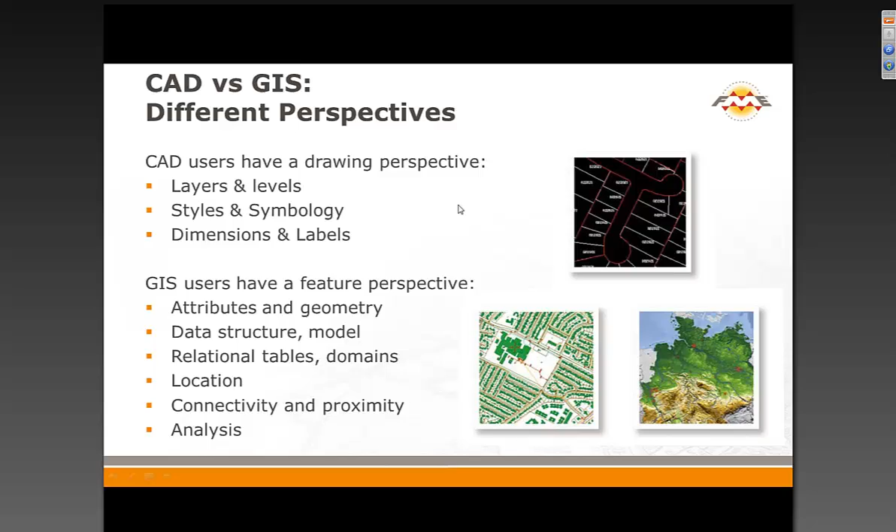So there's lots of differences to deal with. So when we're working with this kind of thing, our approach, we say let's preserve all that we can. Let's give you, as the data jockey, all the information that's possible in the CAD and give you levers and ways of pulling that out and putting it into sane things over on the GIS. So we can interpret the layers, we can get out the style number. Oh, if it's a green road, that means it's a logging road. Great, we can do that. We can fish all those things out and rearrange them very painlessly along the way.

Now, CAD to GIS is what we're talking about. You might go CAD to CAD, where all you're outputting are the things that don't follow the spec. And you give back a CAD file to your technician, and he says, okay, great, if there's things in here, I got to fix them. Or, I think we're doing dog parks today, aren't we, Mark, where we're going GIS to CAD? Yes, we are. So that we can go the other direction. You've got a nice GIS. You want to make some files in CAD for your friends and even give them some symbology.

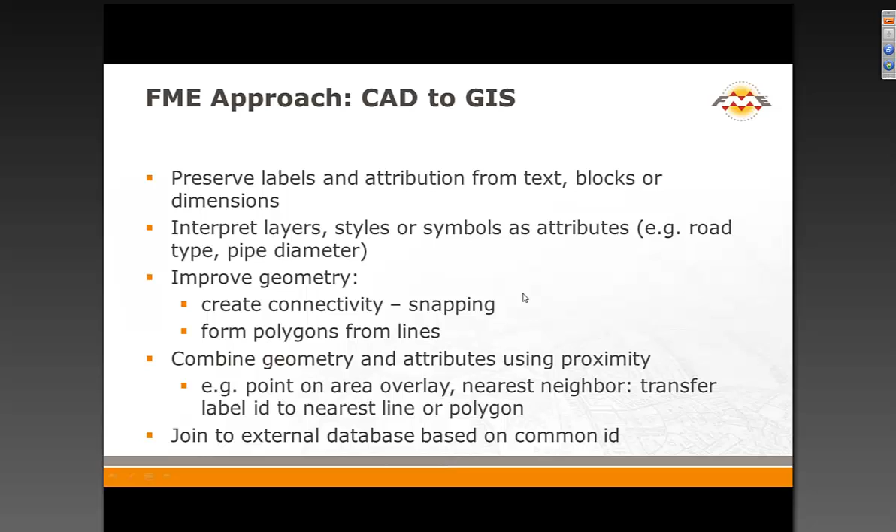And I'm going to dare you, Mark, to show the DWG styler. Are you going to take me up on that? Oh, yes. We'll use that one for sure. You whip that up while I'm talking? Okay, great. So that's a key transformer. We'll definitely look at that.

So just last quick poll. What are your biggest problems that you have to deal with? And this is where Dave is going to whip up other demos, I suppose, depending on what they answer. That was a really good worried look on his face just now. So let's see what kind of challenges. It's attributes, attributes, attributes. It's kind of like the 3 things you need to know for real estate. That's what I think too. And coordinate systems are always a lot of pain.

I guess with the new FME Data Inspector, we could at least help you: you could tag your CAD file with the coordinate system and put it on top of a background map and see where it lies to try to guess things. Yeah, that's actually a very good technique. Maybe I'll get you to whip up something like that, Dave. Were we going to show the Data Inspector? I believe Mark is going to show the DI. Yes, we'll show that. Do you have a background map there, Mark? I can put a background map on for sure.

Well, you can whip that up in about the next 10 seconds between now and when we go live to you. So let's close the poll, and I will carefully analyze those results while Mark gets his demo ready. So overwhelmingly, it's about attributes.

And so we will spend some time on that, and I will throw in a few comments of horror stories and symbology going the other way. So the DWG styler, big deal. And the object data people are in the minority, so in our system of voting, they would not get representation at all. But we are going to try to give them at least some airtime today talking about object data.

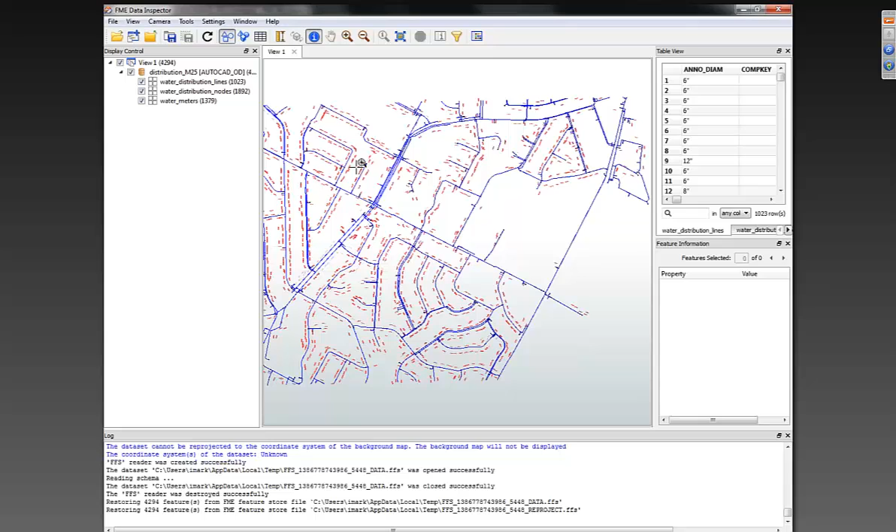And I don't know if I've got a background map turned on or not. Obviously not, nothing's popping up, but you can see the information, you can see all the three different layers of data we've got and how many features are on each of them. I can zoom in and start looking at this and finding, well, okay, we've got water meters of these numbers, which presumably is an ID, and then we have water distribution pipelines, which has got a diameter and a few other characteristics and attributes on there.

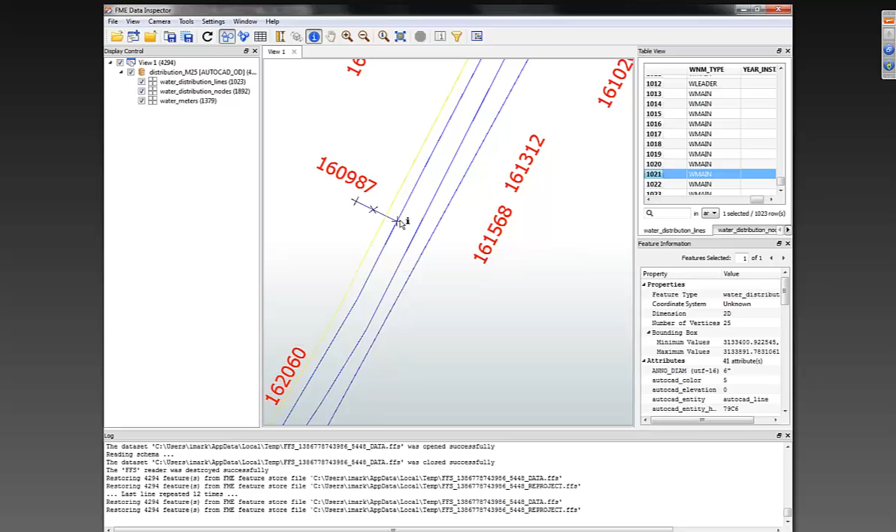And then we have these little cross symbols, which are basically exploded blocks, I think, representing the nodes in our water network. So I'm looking at that, and the data's looking okay. It's okay to go ahead and do the translation here. Let's just do that, since Dave asked about that. So here's where we're going off-roading, huh, Mark?

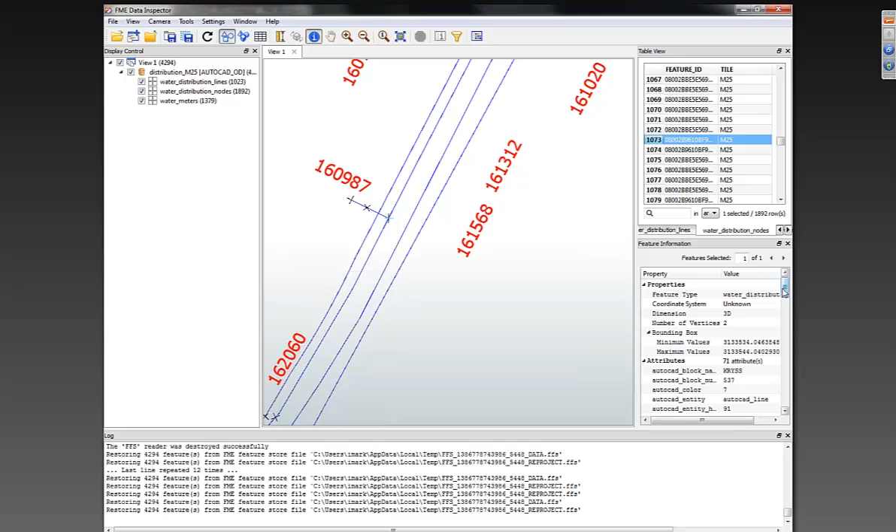Yeah, see, I do have the background maps turned on. I wonder if that data doesn't have a coordinate system set, and that's why it's... And yes, we can tell the coordinate system is unknown from your feature information window. Yes, right. It should say somewhere... It does, right there. System unknown. Okay, so looking at the coordinates there, and knowing what I do about this data, I'm going to open it again and specify that this is in TX83, Texas State Plane, in feet, and now it should load a background map. I'm hoping. Yep, it's coming in. There we go.

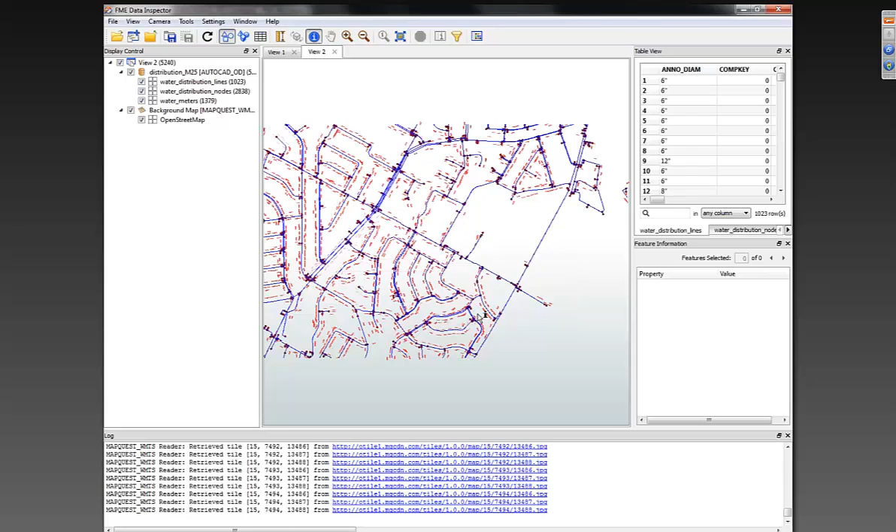So this is new for 2014. We've got the ability now to load background data from web services directly into here, just to make it a little bit easier to get an idea of the data itself. So I guess if folks don't know their coordinate system, they could use this and start guessing a few and then overlay it, and when it sort of lines up... I'm sorry that it's not more magical than that, but right now that's about the best we can do. So okay, we can see the data, we know that's fine. We've got this translation set up in Workbench, so I'm going to hit the run button.

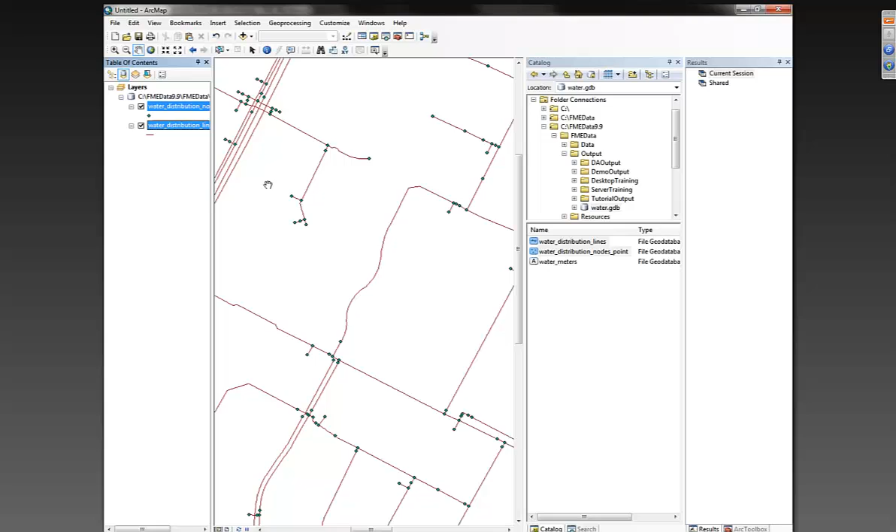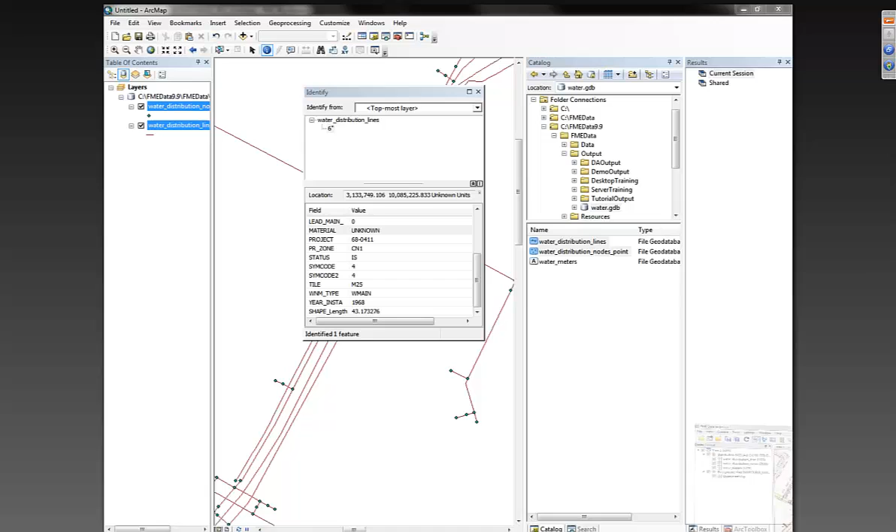Let's not bother with meters, let's just get the nodes and the pipes. So there we go, we have data that we've translated across, and if we query that, we should get the same set of attributes that we did before. So it's the annotation, diameter of the pipe, and all of the statuses and all of the other attributes, the material. All of that. So that was Map 3D. That was Map 3D object data that you fished out of there. That's right. Yes. And just to mention Map 3D, if I've got a moment.

When we open a dataset or read a dataset, you might have noticed the parameters button. If I click on the parameters button, that lets us group our data in different ways. So we can group it by entity or by the object data table itself. In this data, we've grouped it by the 3 different layers we've got, but we could group it by object data as well if that was different, or totally the raw relational tables. We could just read all of those out separately if we wanted to. Yeah, it's very powerful, and folks can do very powerful things with the object data in Map 3D.

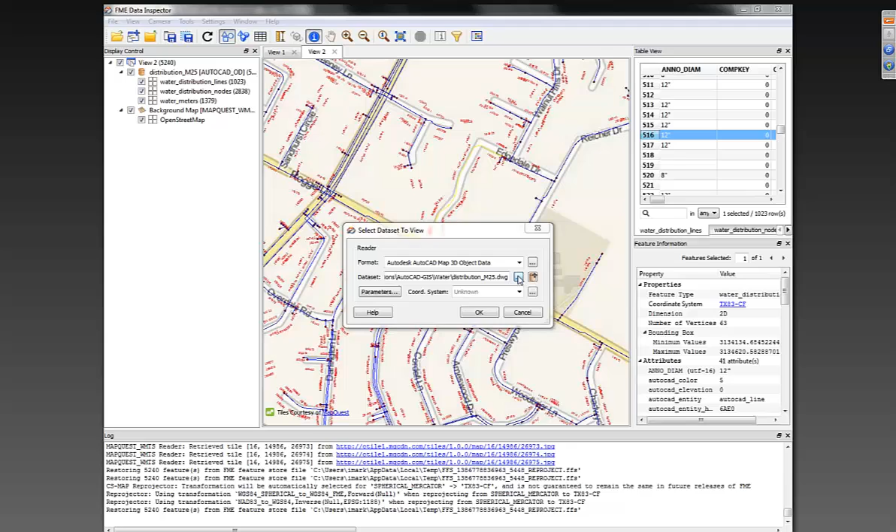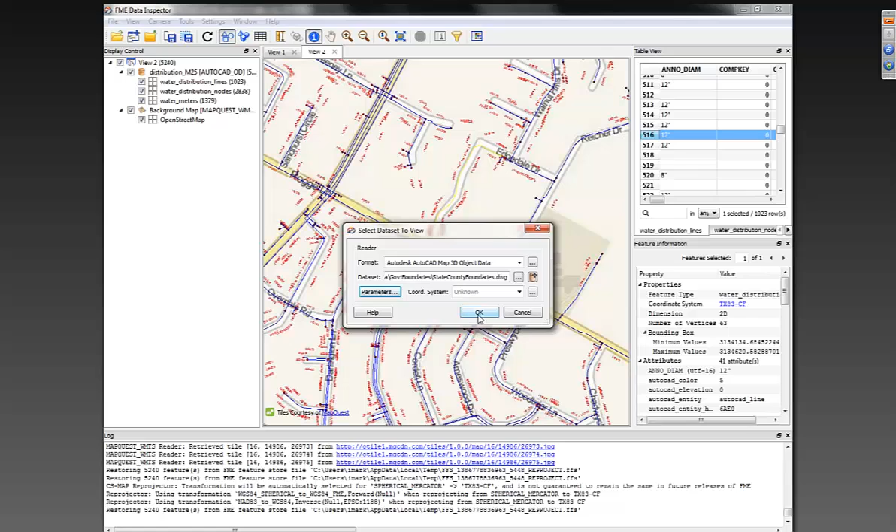If you're not a Map 3D person, and let's say you had extended entity data that you tucked stuff into, Mark, have you ever dealt with that? Yeah, we can read extended entity data through the plain AutoCAD reader, and probably the Map 3D one will do that as well. Yep, we've seen a lot of data tucked away, and also people often use some form of database linkage where they have the attributes sitting out in a database, with some kind of a key inside of the CAD file. What do we do then, Mark?

That would come up as what we call a format attribute. So yes, if I query something, we can use it. Oh wow, there's Texas. You got all of Texas here for us. Yeah, I just wanted to show this because this was a Map 3D data set, which I really like, because the thing about Map 3D is you can share lines. Like the edge of the state can also be the edge of the county in here. And so that's what this Map 3D data had.

And what we've done, we've pulled it out as the Map 3D table. So basically we should have 2 lines there now. So we converted that one line into 2 features. So now we've got a feature there for the county and a feature for the state boundary. Or we could keep the 2 as one single line with attributes that said it linked to both.

Right, so I can see in your feature information it shows you've got 3 things selected. Can you just pan up to the top of that so we can see the feature types? Yes. So there's the boundaries, that's the county data, and the state data. Right. And those tricky Map 3D guys end up storing that as one thing, but the GIS guy might need that in 3 different places.

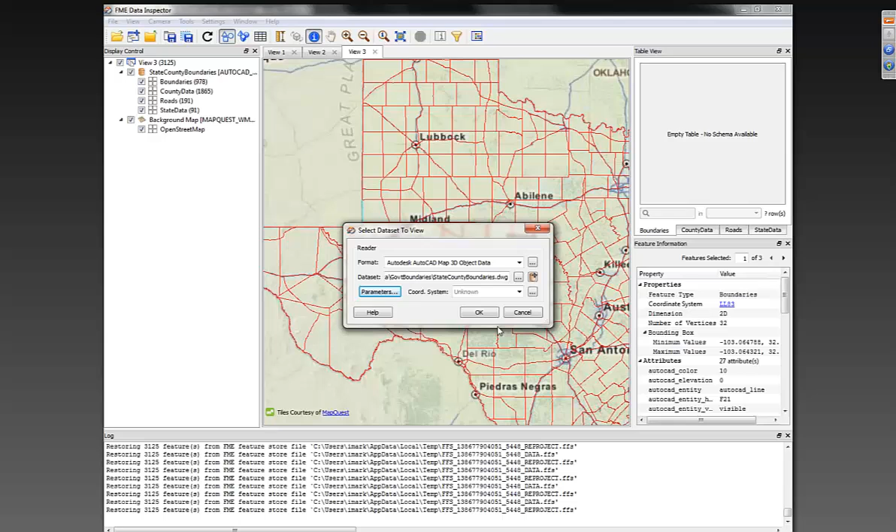That's right. And we can still do that as a single one. I think group by entity will keep it so. We'll then merge all the attributes on. Yes, so we'll keep it as one single feature, but like you say, merge all of the attributes onto the same one. So there we go, only one. That's everything, but you can see the layer says boundary.

There's also state and county data, so we know it's everything. And it's got the attributes. I see the state is Texas, the county is there too, Andrews County. Yes. Excellent. So there's several different ways we can read the Map 3D data, which I really like. That reader, I think it's fantastic.

It is dangerous though when you're messing with Texas like this, Mark. I'm not messing with Texas. We're just...

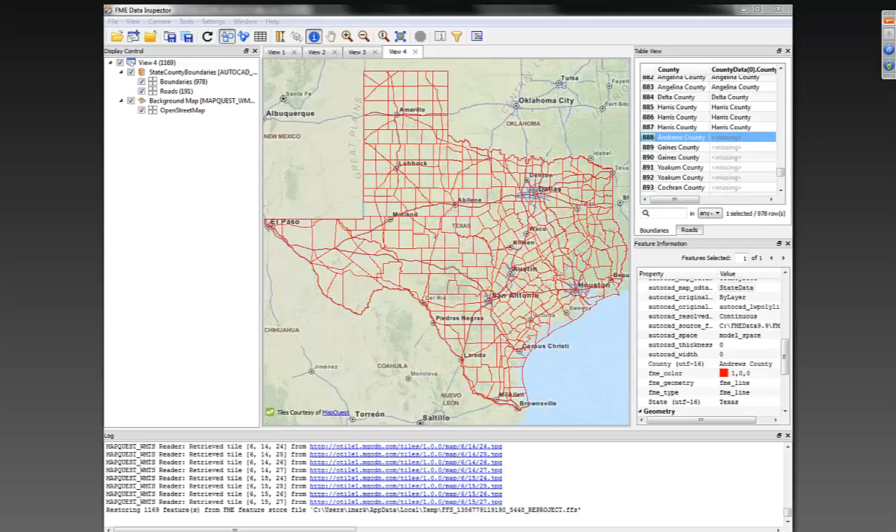Okay, so let's go for another demo. What we'll look at here is doing a bit of transformation of one of those strange scenarios that you were talking about, Dale. In this case what we've got is the attributes are stored as pieces of text or labels, and we basically need to find those labels and attach the information onto the features itself. Ah, the old label gag.

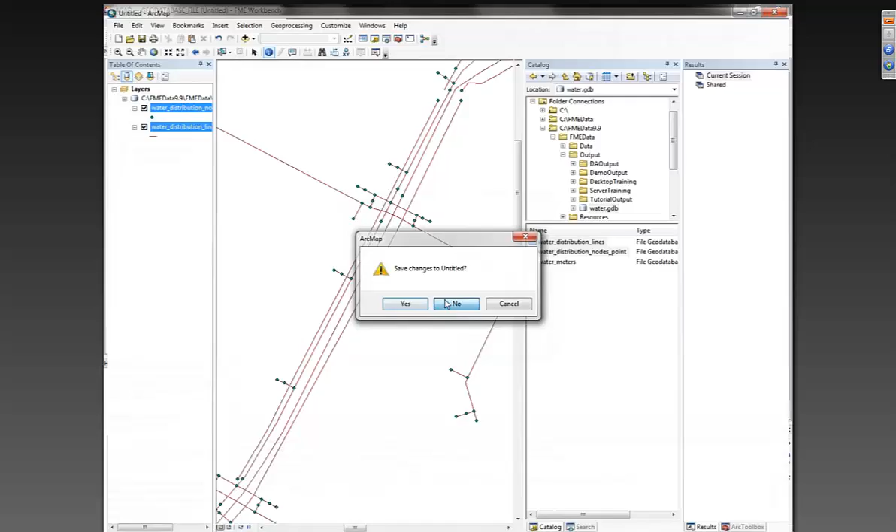Yep. So we're going to read just some plain AutoCAD this time, and it's the wastewater. And we might as well go to Geodatabase again, and we'll just say to overwrite that Geodatabase. And I'm going to shut down ArcMap as well, just so we've not got that locked in any way. Okay, wow. So what have we got here? Well, let's have a look. I think perhaps I generated that slightly wrong. Let me try that again.

While you're regenerating, someone asked if we can write to object data, and absolutely, and we can write it in very powerful and interesting ways. So that'll all be part of that webinar that Dave's whipping up for me to broadcast soon. Yes.

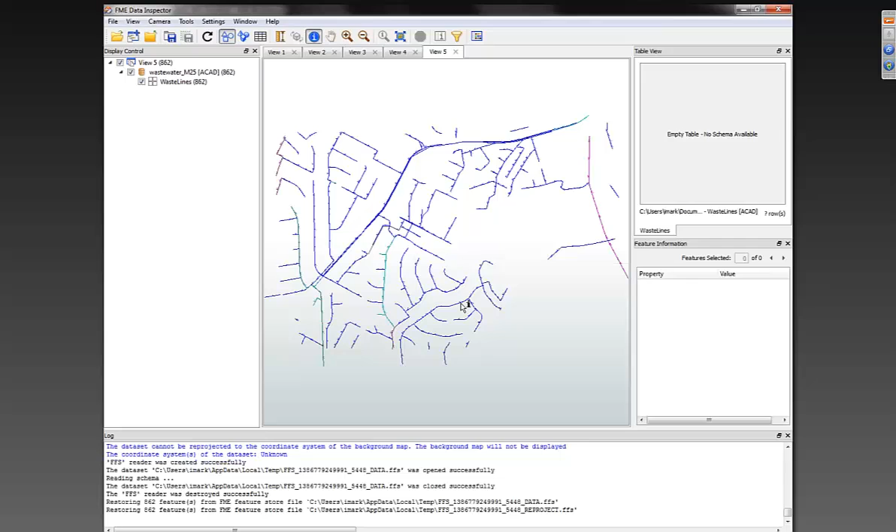Okay, hey, that looks cleaner, Mark. Yes, so there we go. So it's through the geometry filter, which is really useful actually in this case, because if I go and inspect this data, we'll find that lines and text are all on the same layer. So we have to filter them apart with the geometry filter. Living together. Yes, they're all on the same layer, and the size of that pipeline is stored in a piece of text that's right next to it, which is a typical CAD thing. I've certainly seen that before.

So what we need to do is basically, in fact, for users who have used FME before, I'll just mention this. In 2014, the geometry filter doesn't have the long list of geometries. You get to pick which ones you want to expose. So I just mention that as an upgrade for 2014. Okay, so we're going to put what we call a neighbor finder in here.

And the neighbor finder... Can you handle that spelling of it, Mark? I can do it both ways. We can do neighbor finder with a U or without a U. Okay, so it should have a U, but I know.

Okay, so the lines are the base, the text is the candidate, so we're just going to grab that.

Okay, so what we're going to do now is say, let's find everything that's within 50 feet of the pipeline. So that's basically saying, for each pipeline, look within 50 feet of it to find the nearest piece of text, and we'll assume that that is the size of the pipe. And so it's going to merge the text attributes on. Yes, that's right. In fact, what I'm going to do is I'm just going to

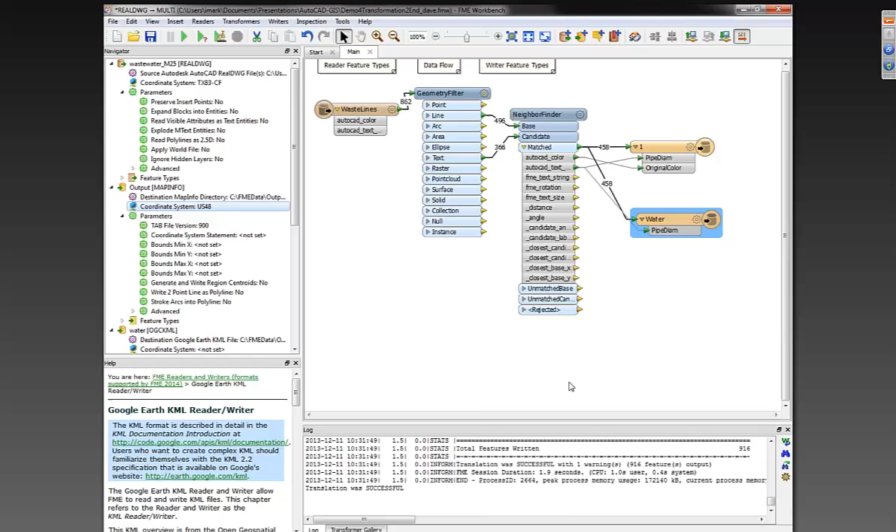Nothing bad will happen. And we don't need to set the coordinate system on KML because FME will automatically translate that into lat long, because KML is always lat long. There's no two ways about that. So notice that when Mark runs, we see a statistical breakdown on our graph about what happened. So 862 things read in, split into 496 and 366. And then you got matches on 458, which means you didn't get matches on a bunch of lines.

If we were worried about QA things, we would then look for unmatched base, which right now is being ignored. That's right. And you could do something with that. Send that back to your CAD guy and say, hey, label these, dude. So that will be the 40 features that didn't get labeled, and we could check where text wasn't used, unmatched candidates as well. We could say, well, this label's floating in midair. Yeah.

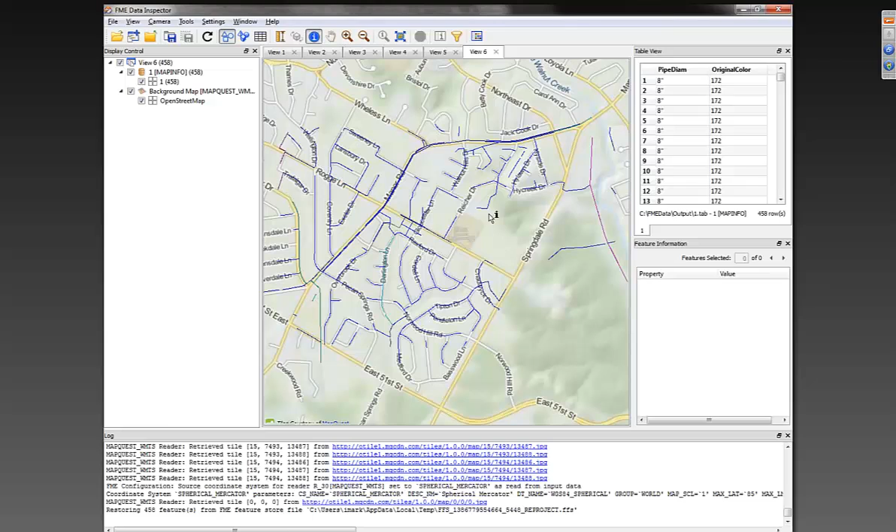And so let's just inspect this data. It was MapInfo I ended up writing it out to, and we get the background map, which is good because that shows it's in a coordinate system. And it's in WGS 84 coordinate system, and you can see we have the attributes in there, the pipe diameter and the original color. So we've grabbed that information out of the AutoCAD data. Mm-hmm.

Okay, so Dave, you were going to do a demo now of Civil 3D, is that right? I think we're going to do a little bit more and show some validation we can do, against the table. Okay, well, we can do that.

We're reading out all of this data at the moment, and it's all coming in on the same layer. So we could put a tester in there to see. Well, what we can do is set a merge feature type, which says read anything on any layer, and that will handle the data. If someone's put something on the wrong layer, it won't matter because it'll come through here, and we can still read that data.

That's handling it just in case all of the data's on the wrong layer. We could put a tester in here and say, let's test if the AutoCAD color is this, then do something. That's a good way if the data's all been color coded, as it does sometimes in CAD data. If you've got data all on the same layer, but the color means a different thing, we can filter that data out, finding and splitting it out by color.

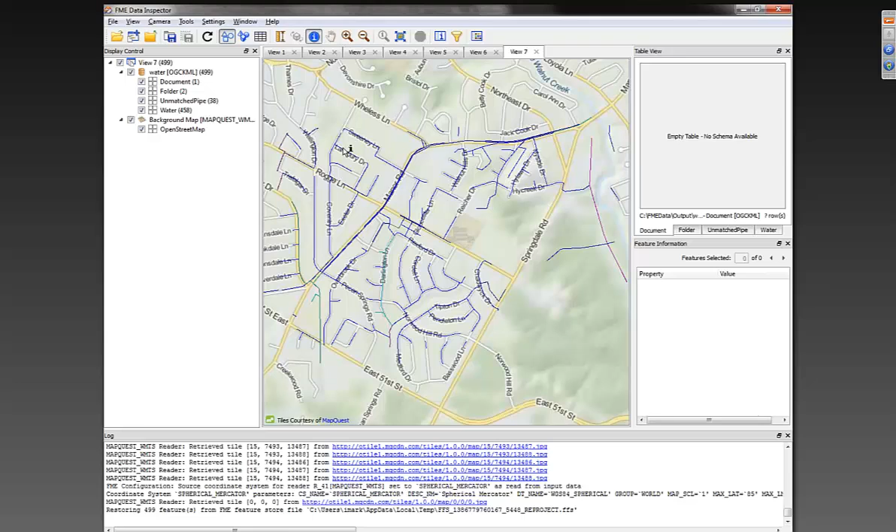We can do the same thing with the unmatched pipes as well. If there's some data coming through, say we've got 40 pipes that didn't match, we'll call it unmatched pipes, and that data will get written out when we run this translation. So yeah, 38 features now. So we know by inspecting this data, it's in KML, that's fine. So where are we? Unmatched pipes.

We'll just turn the background off. So you can see these pipes are the ones that didn't have a label close enough to be matched. And of course, their table shows that all the pipe diameters are missing.

That's right, yes. So let's switch over to Dave now, and we'll make him the presenter. And there you go, Dave. Dave has done another slight addition to this, where it might get tedious if you have lots and lots of things to validate.

You could put the validation rules out into another table. So here's the idea where you've got this table that lists the valid diameters in your case, right? Yeah, I essentially picked the diameters we had in this case and removed one just to see that it would work.

So I'm reading in the CSV table using the CSV reader down here, and we run it through to a feature merger. This is going to merge the diameter of the CSV file against the text we've read off of the label, and make sure it finds a match. If it does find a match, it will go to the output. If it doesn't find a match, we'll just log it in the log file for now. Let me just take a quick run.

Okay, that's unexpected, but we won't worry. We're on a short time, but essentially it will work. When there's red in there, it means the demo isn't working, so we'll just hit stop. Yes, and we won't worry.

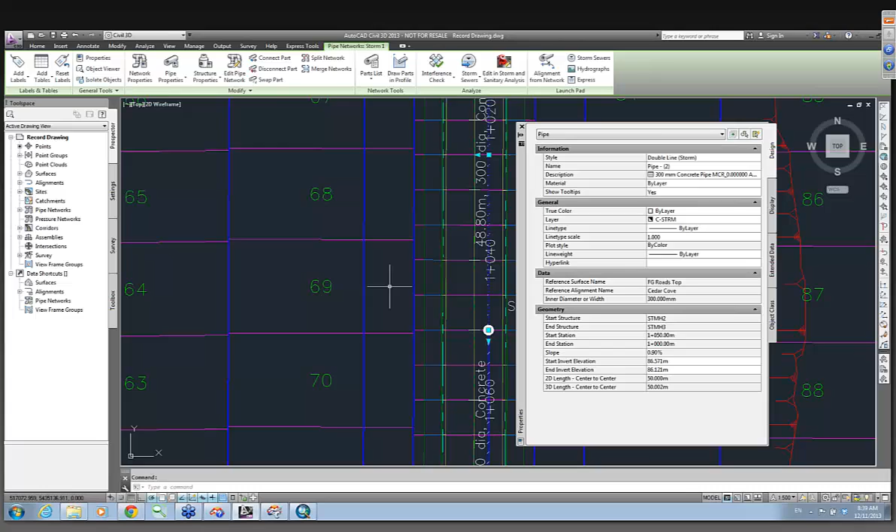So this is a sample Civil 3D file. Again, we're not going to read everything in this file, so I'm going to concentrate on something useful to the plumbing guys, which is pipes. So we have a pipe here, and it's got some interesting information on it. Most importantly, it has invert elevations, 2D lengths, and a slope — things you need to know when designing drainage systems.

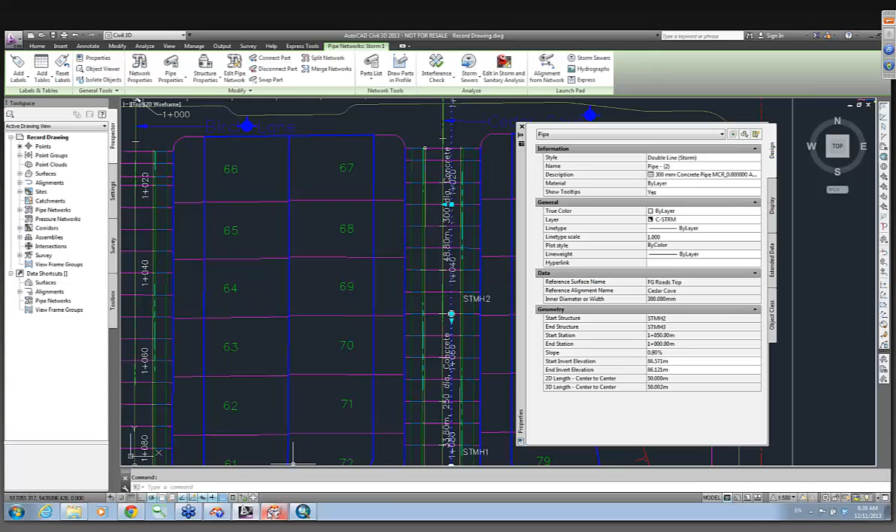We're going to bring this into FME. The first thing I'll show you is that when you read a Civil 3D file into FME, you have the option to just read the Civil 3D entities, or you can read all the Civil 3D and CAD entities. In a lot of cases, people build up a Civil 3D file by bringing in CAD data and manipulating it to build proper structures. So we can grab just the Civil 3D data, or all the construction data as well, which is read in similar to standard AutoCAD, as layers. We'd probably want to expand blocks off, and you have all the other options you'd normally have with AutoCAD import.

So we're going to cancel this, and I'm going to go, like Mark did, big on the whole canned cooking show type thing.

We're back. This is a workspace I've made to bring in that information from the Civil 3D file I showed you into FME. And what Dave has done, for those new to FME — you've spent a little time making this nice and pretty, pleasant to look at, using bookmarks to color the different themes you're dealing with.

Yes, and I find that really helps if you create a workspace and then go back in six months trying to figure out what you did. I'm getting to an age where I don't remember that so well anymore, so tools like this aid your memory, and it looks pretty if you're trying to impress your boss too. I'm impressed.

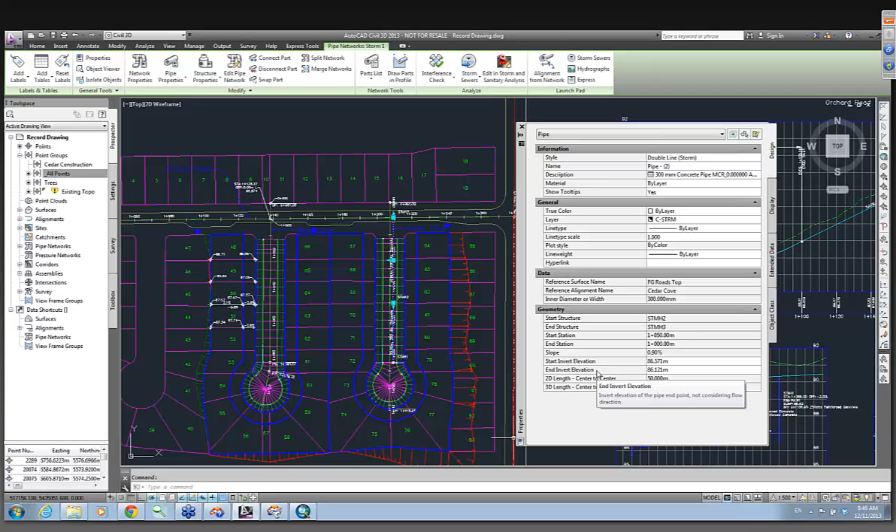Now the most processing goes on here in the pipes. One interesting thing, if we switch back to the pipe information, is they have these start invert elevation and end invert elevation. The sneaky thing about Civil 3D is it tells you information it doesn't store. So in this case, the invert elevations are not actually on the pipe features as they come through. What they give you is the pipe centerline elevation and a pipe diameter, and from that you can calculate the invert height and the crown height as well.

So essentially, that's just what I've done here. I've got a length calculator which calculates the length in 3D. I renamed a few attributes and rounded them off to the nearest 3 decimal places to make them prettier. I extracted the beginning elevation and the ending elevation, and then used the attribute creator to do a bunch of calculations to get the invert elevations as well as the slope.

So from the length and the elevation difference between the beginning and the end, you can actually calculate the slope, and that's what Civil 3D does when you click on that to give it the information. So again, that's something we have to reproduce, and we can reproduce it quite easily within FME.

Because this way you can tell that your water flows downhill. Exactly. It's very important, because it's not all water.

So what do you do then? This is the resulting output you're going to show us? Yeah, this is the resulting output here. So this is in ArcGIS now, Civil 3D to ArcGIS. Yeah, ArcMap. So here we come out.

I've just thrown a few symbology settings here. So we have our pipes - we put little arrows on the pipe to show the direction they're flowing. We have spot heights with elevations, and we've got your trees showing which are deciduous and which are coniferous.

And if I click on our happy little pipe, we'll see that we have indeed gotten the invert elevations and the crown elevations, the slope percent, as well as we've extracted these things named after some interesting people that I have no idea what they do, but they seemed important, so I threw them in. Okay, so essentially that is a Civil 3D transformation.

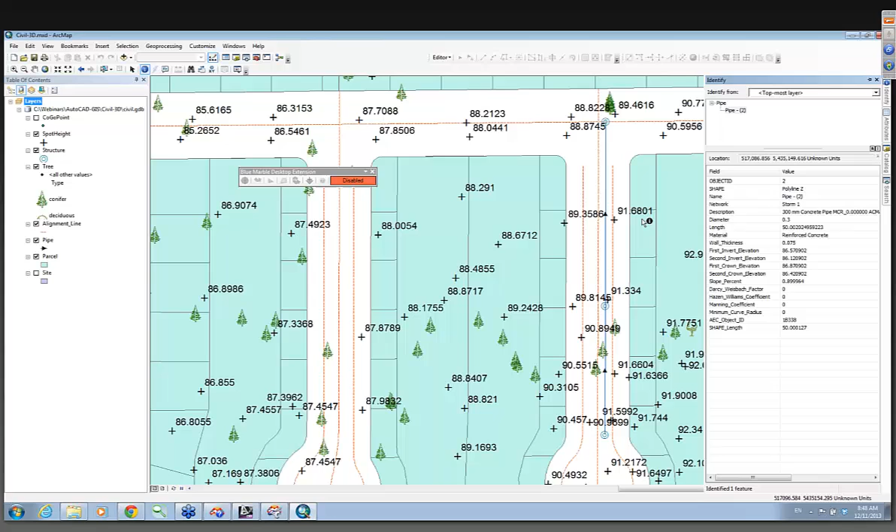So it's not dead simple - there possibly may be a little work involved, but as you saw, the workspace was not really that complicated.

Right, so we're closing in on the last couple demos. Mark, I think you're going to do some dog parks for us now. Is that right? I am, yes. And your mic is a little bit far away, Mark, I think. Oh, sorry, there we go. You're right, okay, I pushed my mic up.

Okay, so one thing I wanted to mention, a lot of people had asked about missing coordinate systems and what you can do about that. Yes, and we do have a bunch of transformers that will handle that when you're converting from CAD to GIS.

There's the basic offsetter, so you can just offset your data if it's on a certain grid. You could offset it and scale it if you know the scale factor and offset for a small local grid. There's the affine warper, where if we've got a set of control lines that says where the data should come from and go to, we can warp the data like that. If you know all of these coefficients, you can just feed them straight into the affiner.

There's a local coordinate system setter, which says, okay, I know it's in a local coordinate system and these are the parameters, I'll set it like that. So yeah, there's several ways that we can cope when the data's coming in but doesn't have a coordinate system, and you need to get it into the right position with a coordinate system. So just wanted to mention that. Very good.

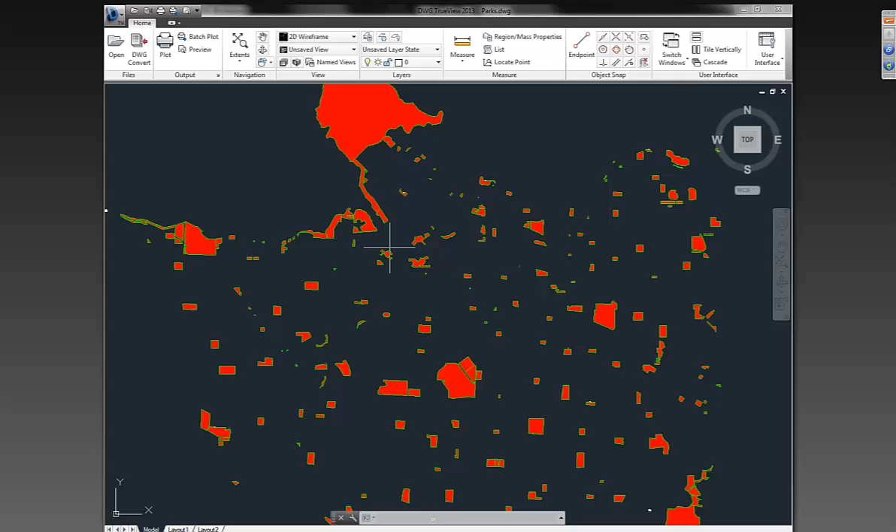This thing's just popping up to say this file was generated by someone other than Autodesk, which is true. We created it, so we know that's okay. We can just continue opening that. And we have the red colored blocks, and now how do I turn that off? Layers, because let's see, can we turn... We'll turn the polygons off. There we go, and we should be able to see the dog layers now. I can zoom into that, and we've got the little doggy block that appeared in there that we created.

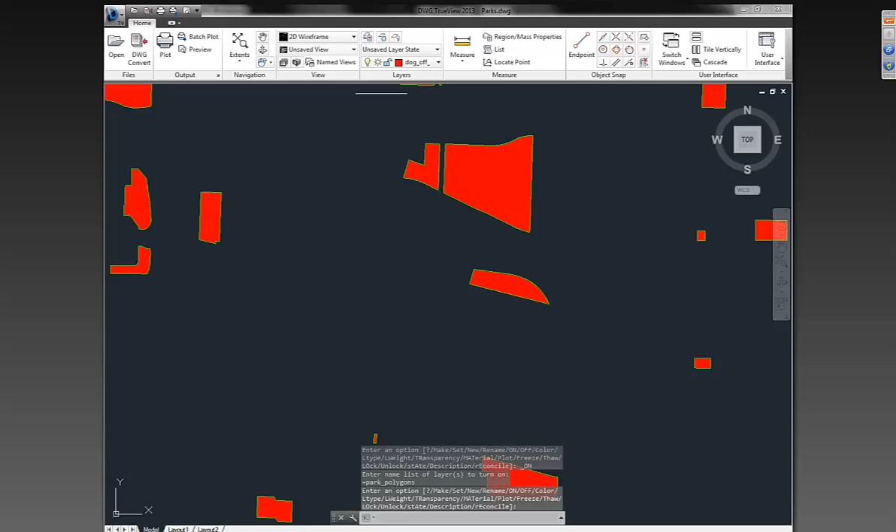So those are the layers. You just can't see those because they're turned off. They're underneath the polygons, and I'm not sure if there's a way we can drag one above the other. So that's what we've got there. So yeah, that's a pretty simple method of converting GIS data into CAD, and just really the key transformer there is that DWG styler, which creates so much of the thing we need.

One other thing I meant. Okay, sorry, Mark, go ahead. Sorry, one other thing I mentioned, there's a question I saw: can you round trip the data? Because if you've got a spline or a NURB or whatever you call it in your CAD and you convert it to GIS, it might get stroked because the shape won't support that, for example. We do have a transformer called CurveFitter. I think that will convert it back into a curve, at least when you're coming back from GIS into your CAD. So you can round trip that way.

One other interesting thing you can do about round tripping is that CAD data tends to have a lot of information, especially symbology and what we call format attributes, which are kind of structural attributes on the data. And CAD tends to have an extreme amount of them. I think between MicroStation and AutoCAD, they account for over half of the format attributes in all of FME total. There are a couple of transformers called the attribute packers. I think the most useful one is the AttributeJSONPacker.

And I've had good luck with that in packing all of your format attributes into a single blob and then storing that into your geodatabase. So you only have a few attributes in your geodatabase that you're interested in, plus this blob with the symbology basically. Yeah, it just kind of sits there. And then when you round trip it back to the CAD, you essentially unpack that blob into all of the format attributes again, and you can get a pretty impressive round trip without having the overhead of hundreds of attributes being necessary in your geodatabase.

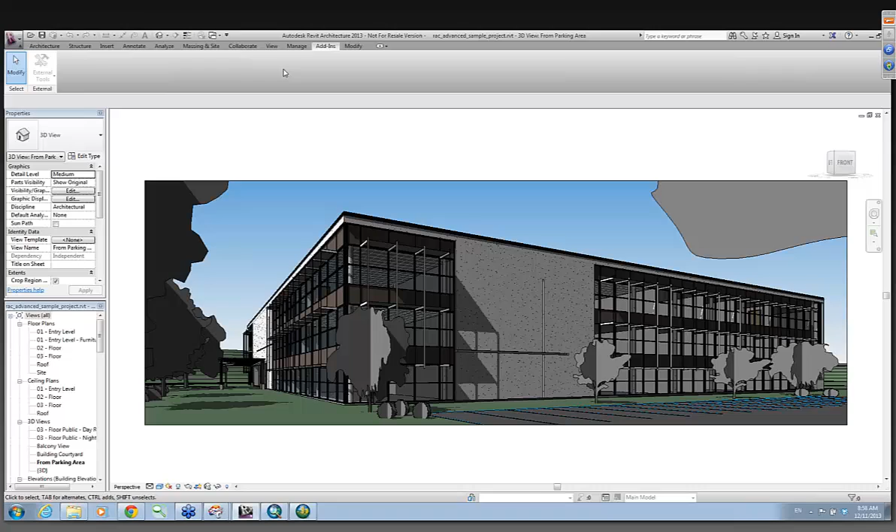Oops, hang on. You can't be in the 3D view. Yeah, I'm not sure why that is. They told us at AU that that's intentional. I'm not sure why, but anyway. So in a non-3D view, you have external tools, the FME Revit Exporter. And this comes up, and it's very similar to the IFC exporter, but it adds some extra information, and it writes out to a different format.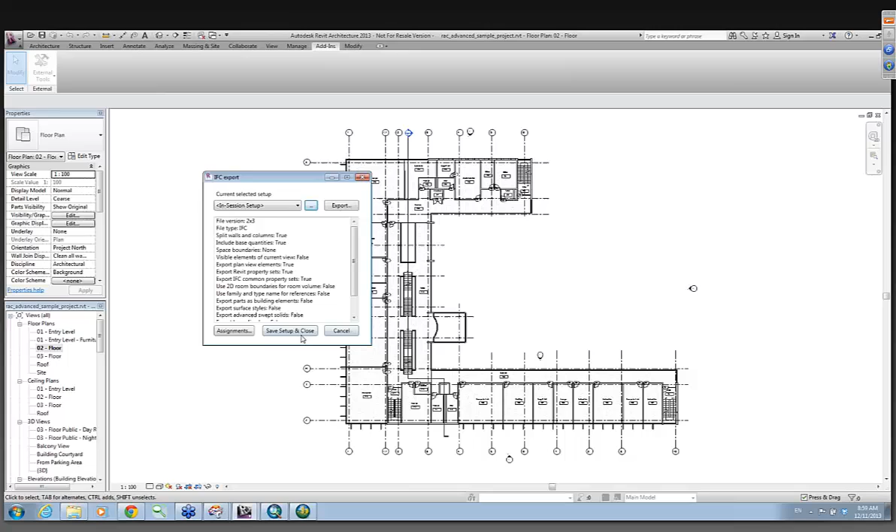So you have the basic things you can do here. There's a setup, which I recommend using. We pretty much just have the basic IFC going in as a default, but generally I like to grab a whole bunch of other stuff as well. The internal Revit property sets. More importantly to what I'm going to show later is the 2D plan view elements. So Revit stores 2D data and 3D data all in the same file, and we can use that to our advantage. So I'm going to grab these, go OK, and normally I would export, and away we go. But this is a large data set, and it takes time to do that. So again, with the cooking show theme, we're going to skip to the next step.

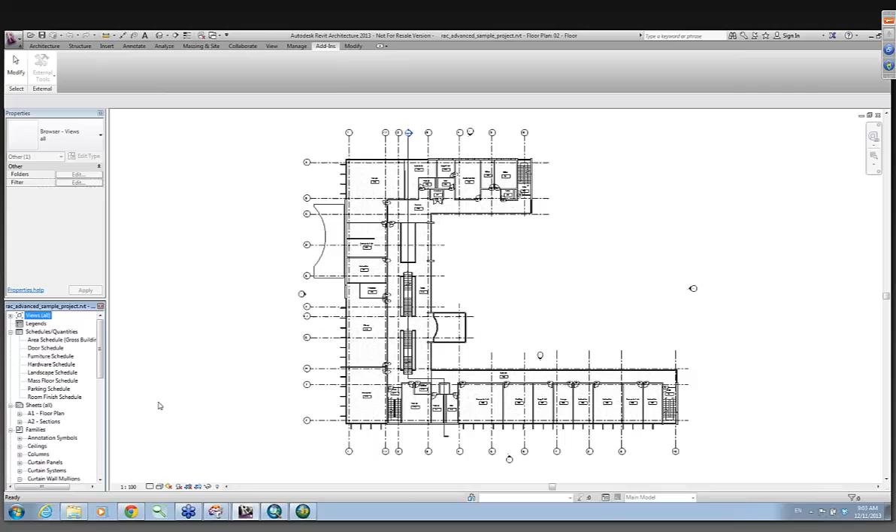So once we've done all that, it goes out to a simple geodatabase, and I'm going to show you the results. I just loaded that into ArcScene, and here we have a model of the building. So if we look at Revit, we go back to our... Okay. How do you get to 3D? Yeah. Okay. Well, we trust you all that you remembered what it looked like when I first brought it up, and here it is in 3D.

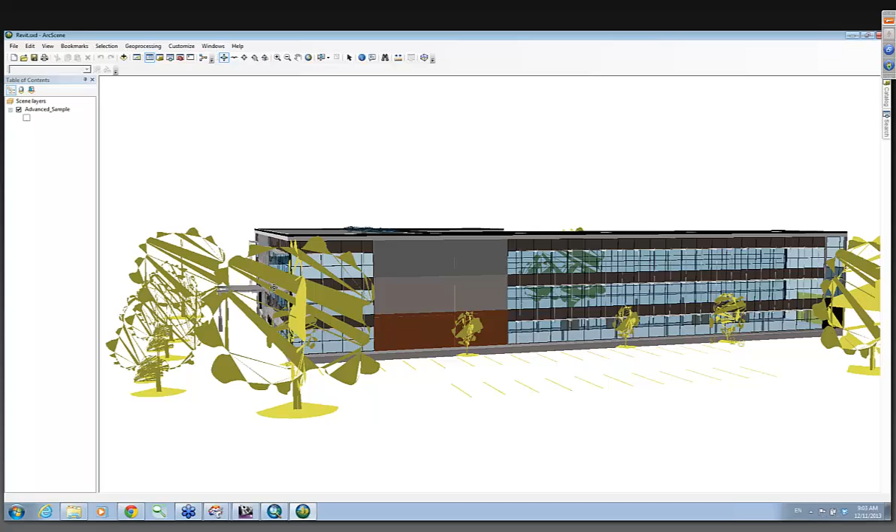You can see that you're getting proper texturing. Now we don't give you the photorealistic textures. Those actually don't get exported with the Revit file, but we do get the procedural color textures, and it handles things like transparent glass, so you have full alpha and everything. And we only took the outside of the building too. So if there was plumbing in there and stuff, we would be throwing that away. Yeah, because the GIS doesn't need it. Yeah, we did grab internal walls and furniture and stuff. But all that stuff is possible to get rid of. But we're running out of time, so I won't give you the grand tour of the big building.

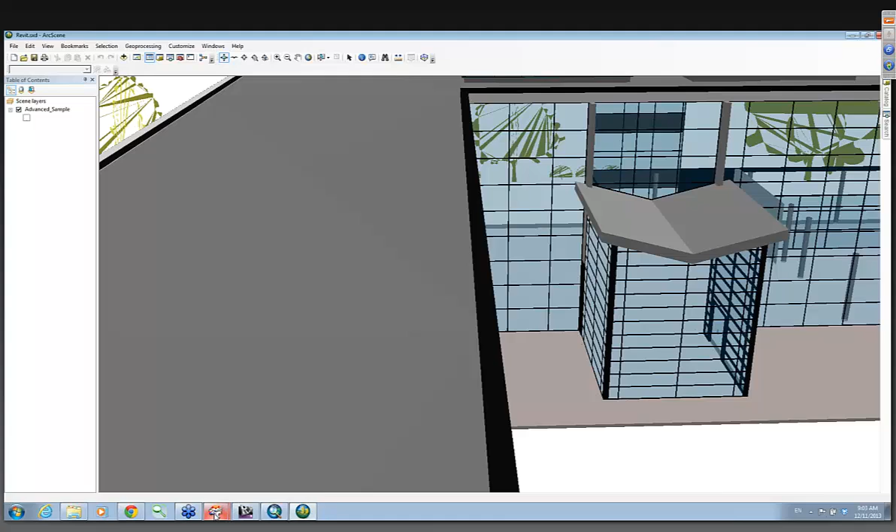And the last thing is you got floor plans for us. Yeah, another element that I use is a 2D floor plan, and this is a bit simpler. It breaks everything down into its furniture elements, columns, stairs, flow terminals, etc. Yeah, you just bring it straight across into Geodatabase.

And now, just showing you the ArcMap, that's the output of the floor plan. So you can see all the walls. You notice that you get the 2D symbols here, and this is why I set the 2D symbols in Revit: instead of having the 3D model of the trees, it gives you a 2D symbol of the trees.

You get doors with their little swing arcs. You get the proper representations of the furniture. So anything that has a 2D representation as well, it will use the 2D representation, which tends to look a lot prettier for your output. So that's just a quick example of some of the things you can do with our Revit export.

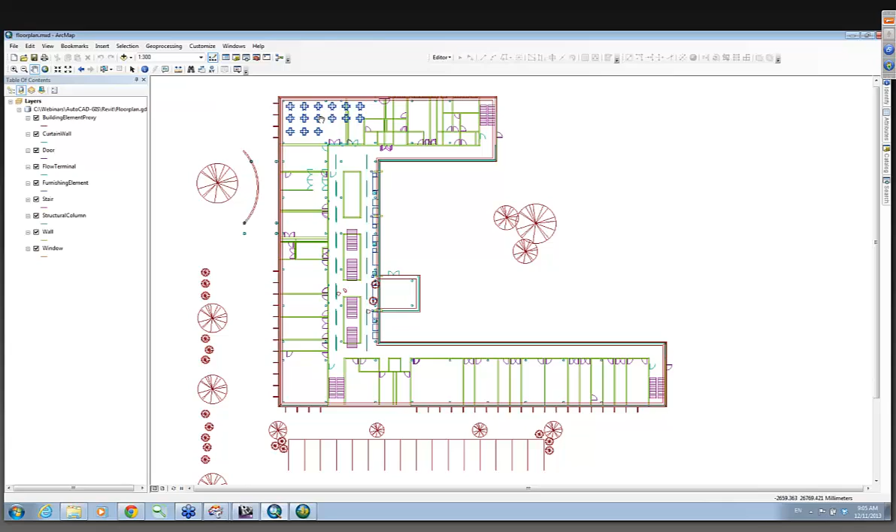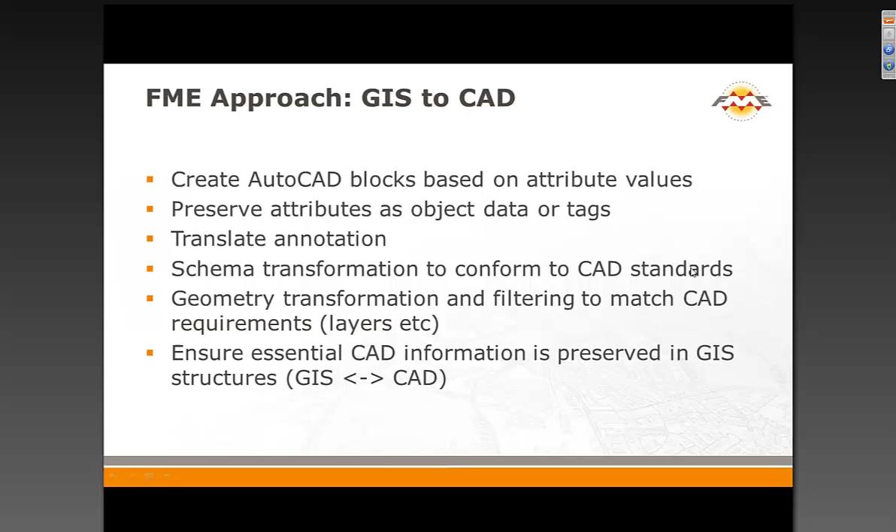Okay, so I think we'll finish up there. Mark Ireland, we got a couple slides just to show the last people that are still there. Thanks. We know we're running a tad late, but let's just finish up. And I've just made you presenter there, Mark. You have to accept though. Yep, you should see my screen now. Yep. So just whip through to the very end there. Okay. You get all these demos.